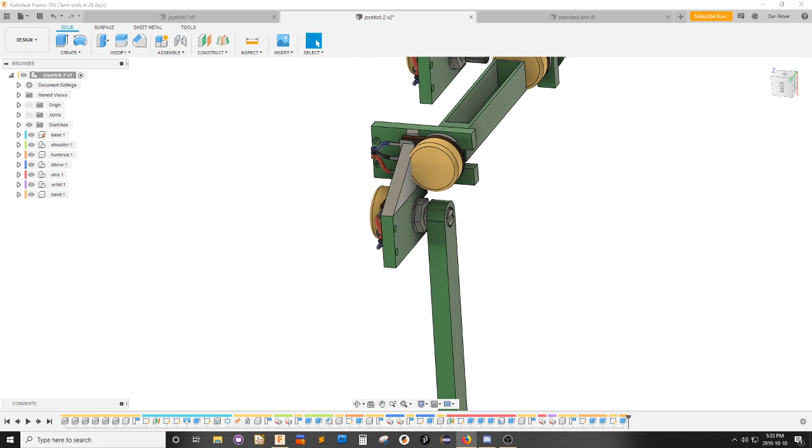This is the last iteration of the joystick that I made yesterday. Here's the original version. This is the joystick for the robot arm that you've seen me building on Instagram. It's a scale model, and all it has in it are sensors.

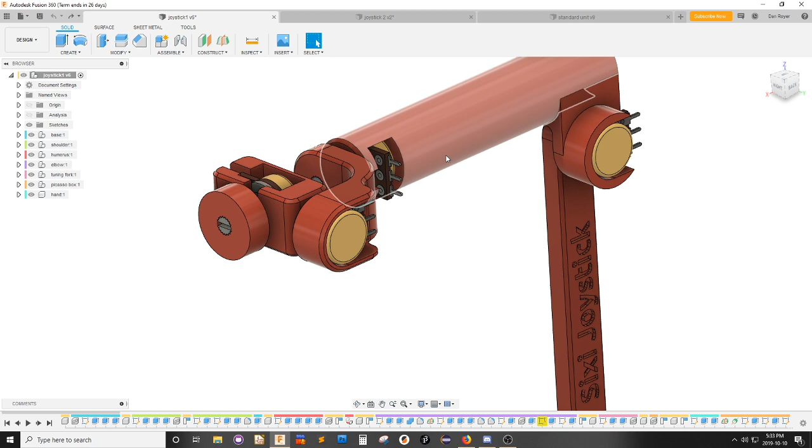These are potentiometers from an electric guitar. They're really cheap. I tried to make a press connector that would fit onto each of these so there wouldn't be any soldering in this design, but I couldn't do it. So my goal today is to look at these, put some wires on the ends in the virtual model, and then add strain relief so those wires will never fall off while the joystick is being used. That way it'll be durable, and then we'll be able to 3D print these designs and test it out.

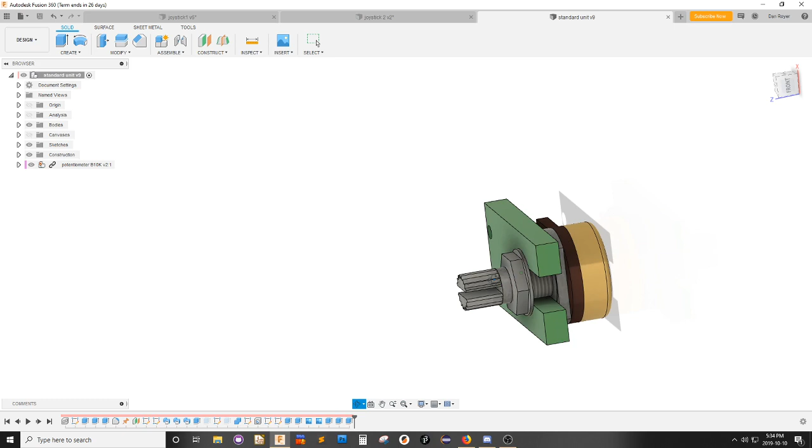What I really want to do is add, I got a standard unit I put over here. This is a potentiometer, that's all the colored parts. On the back here you can see 3 wires that I modeled with a sweep command, I believe it was. And then this green block is a 3D printed piece.

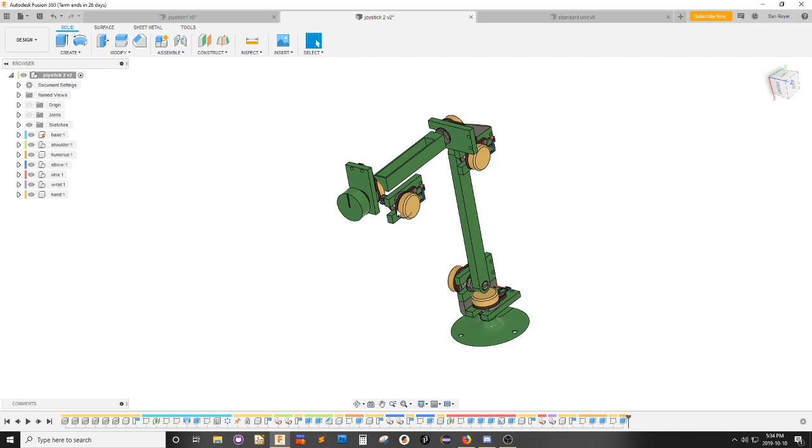So what I got from that is this design. You can see each of these standard pieces here, and my goal now is to connect these pieces together into a single block that I can 3D print. Ideally, when these blocks are put together and 3D printed, there's no support material at the end of the job, because cleaning parts is stupid. It's a waste of plastic.

This was hollowed out with a shell command, and I have no idea if it's a good idea. Where was the shell command? This one. I can suppress that, and now it's just a solid block of plastic.

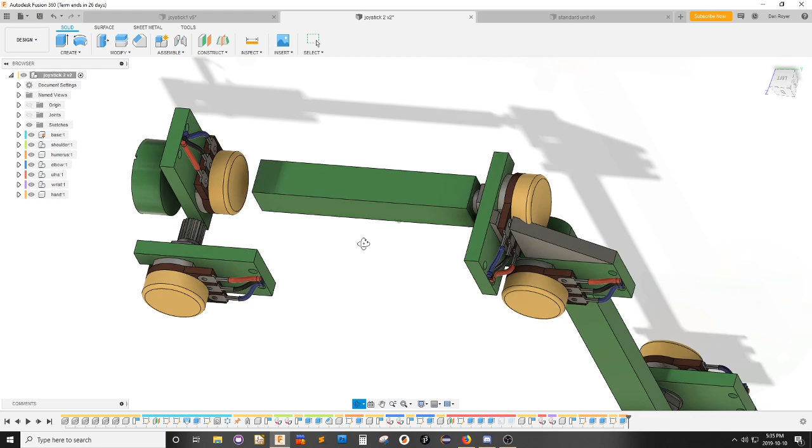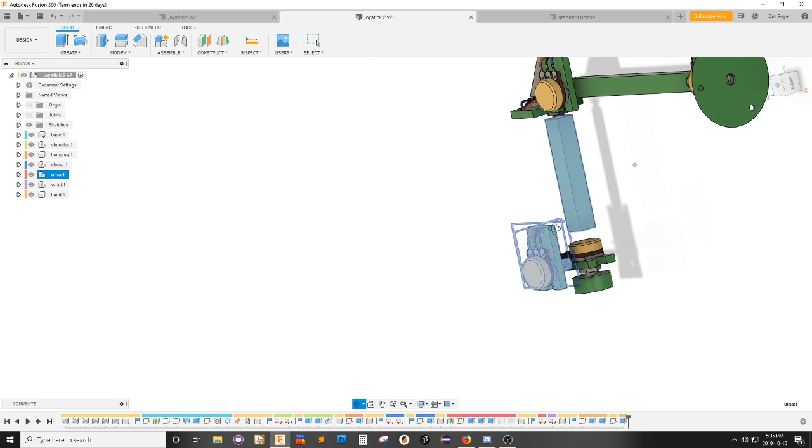So of all the parts in here, this one will probably have support if I print it facing up like this. See, there'd be a block in here to fill in this gap. No matter how I turn it, if you imagine this piece and this piece were glued together with something in the middle here, there's going to be a side that needs some support material. So this piece really pisses me off.

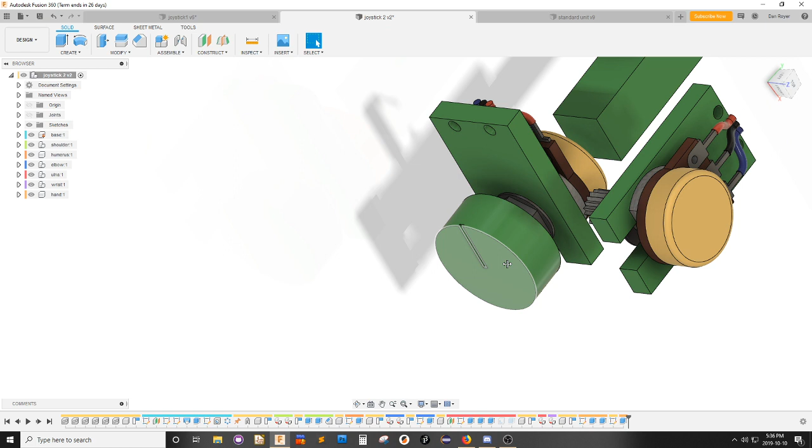What else, what else? This has a line on it to indicate direction, and this is the hand, and you twist this. But this is just a placeholder, because what you really should have on the end here is probably a handle, something that's easier to grasp.

Those of you who are following along who have your own design software, you could show me a model that you think would fit on here, and I'll print it out and try it.

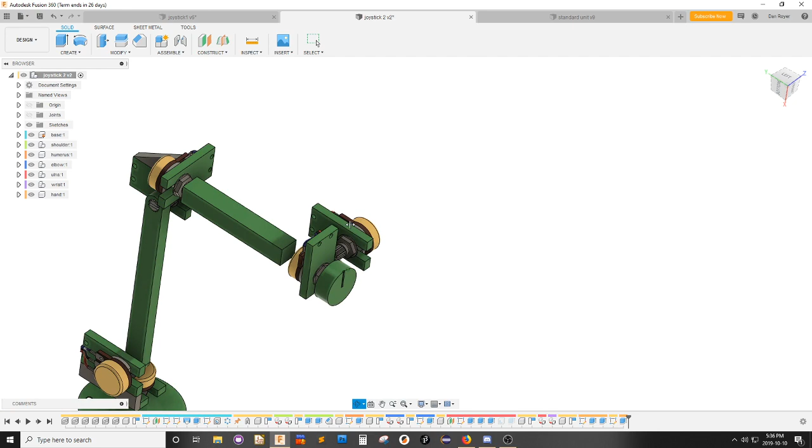Okay, what else? So I have to connect this piece to this piece, and if you have ideas about how to change this so that I can avoid the support material that would probably be under this edge, under this side here, then I would like to hear them.

Because right now all I got is to bring this side down to match this edge. And for symmetry's sake, I feel like I need to go this way up to this edge. Now there's a lot of waste material in there. I'm sure we can cut some of that away.

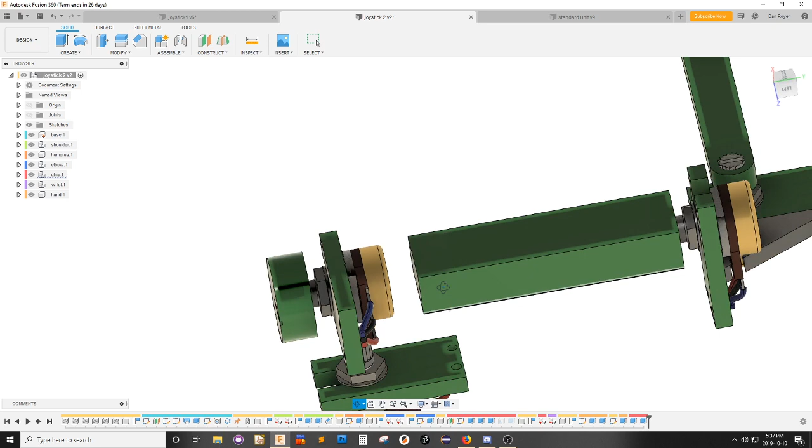Next, let's connect this part and that part. Let's see, yeah, I'll do it from this direction. I select this face, that is in the ulna. I want to create a new sketch on this face, thank you. I want to project this whole face so I can see those corners behind there. And then I want a rectangle from here.

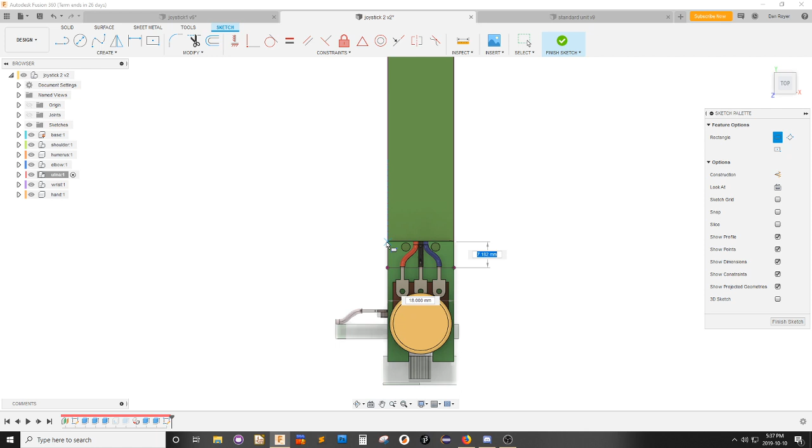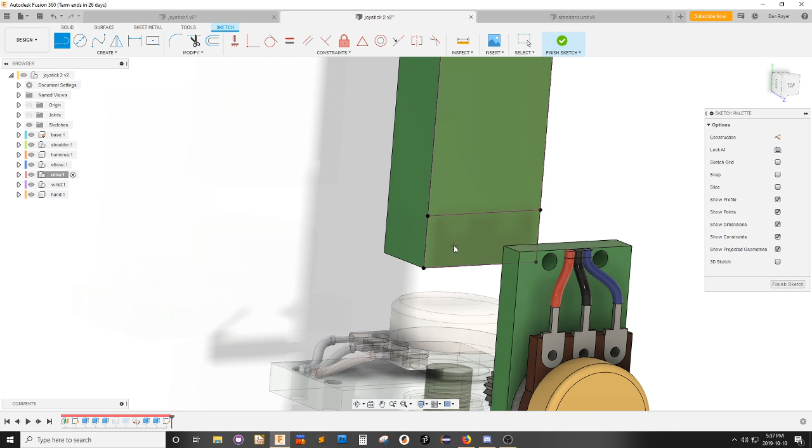Oh, let's project. No, I want to project P. Yes, that one. Great, so there's the block, and I want to, oh, I can't extrude that yet. Right, I'm going to draw a line here, and a line here. Now that should, yes, that is closed. I'm going to bring that all the way up until it touches the other side.

So that's at its simplest, ugliest, most basic design. But when I print it this way, there's a little support material between these two edges. Boo, hiss.

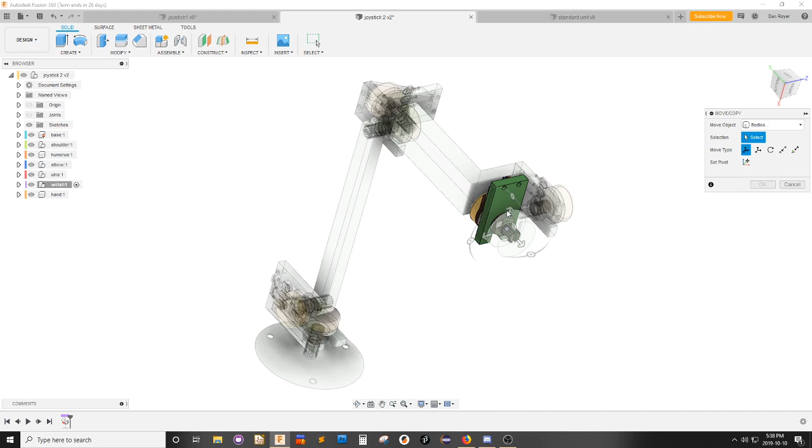This part on the end, this wrist, I think I need to turn this whole thing. I want to turn you around. Yes, please, that line. I want to turn you. No.

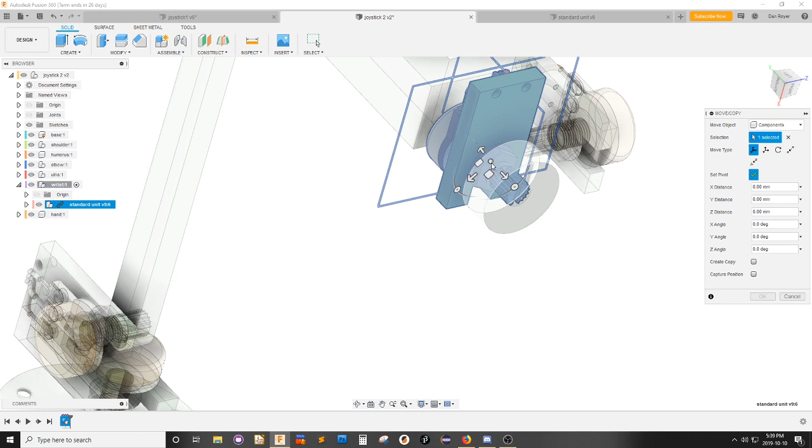This, turn you around. Get that circle again, where did that circle go? Yes.

And I want to turn you 90 degrees this way. See, this is, oh, this is the worst. This is the one piece that needs to come from above like this. Actually, if I do it for this one as well, then I can avoid that support material. Okay, great.

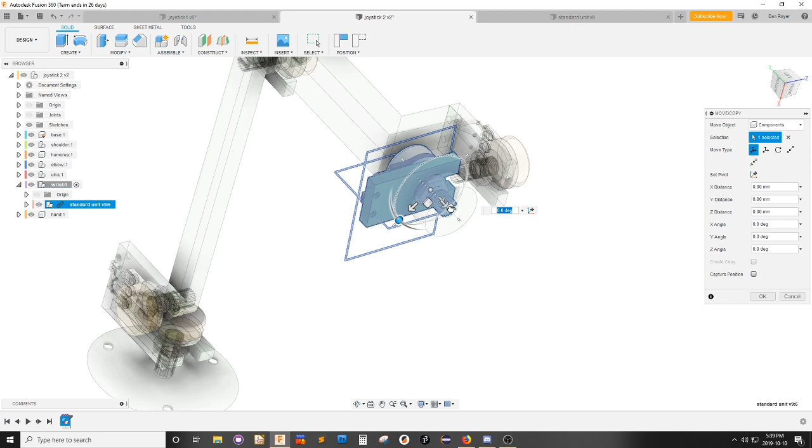Now the reason I want to put it this way is because when the wires come out here, they will loop around this way and attach here. And the wires from this side will come this way and maybe come through a hole here and meet up with them. And then they can both run down the outside of this arm.

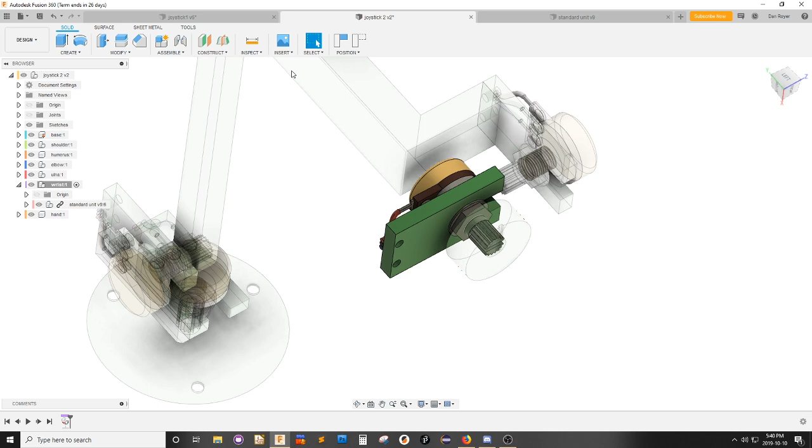And when they get to the back of here, there's an extra loop which zip ties in with these other three. And then these come down with a loop to here. And then maybe they come down with a loop to here. And then all these bundle together with these two and they come off of there. And so you've got a big cable at the bottom. It's got all the bits.

So let's try that again. This one comes to here, and this one comes around this side, and they meet up, and they come all the way down here. They meet up with this one, and they come down here like this. And they come down here, and then they loop off to here, and they meet up with the last two, and then they come off the back.

And then that goes to an Arduino, and that Arduino connects to your computer, and that's how the signals from this go into the simulator or drive the robot. That's the message that gets sent over the internet to my machine.

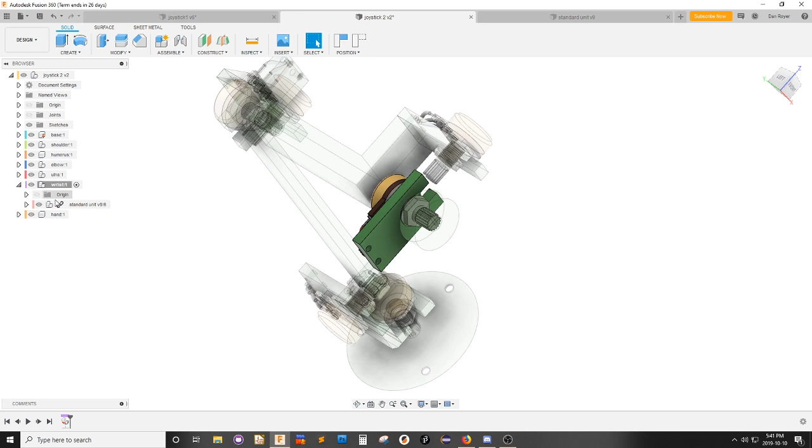Okay, so this is fine, but it needs to cut from the other side, right? Let's see. If I do the standard unit, if I copy, see, I'll close the standard unit, and I'll copy this to right here in the joystick folder. Yes. And rename this standard unit side cut.

Which way would that be? Let's say that peg is south, so I want a west cut. And this is a standard unit. Standard unit south cut.

And I want to copy this again right here and rename this east cut. So I've got unit west cut. So now I've got to change this to a west cut and this to an east cut. Let's do that.

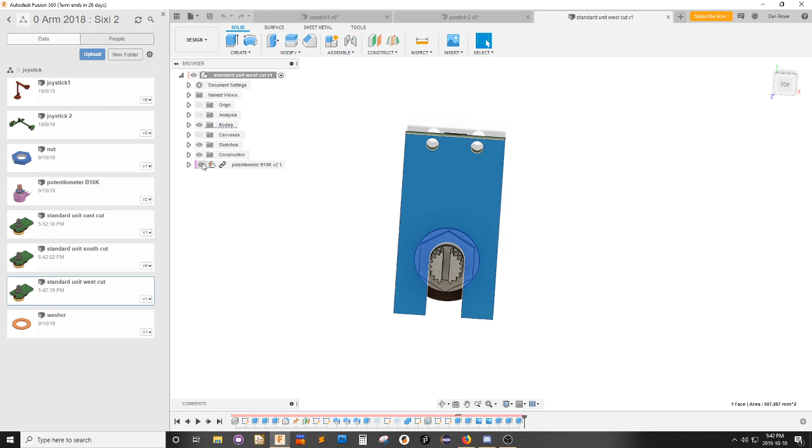Okay, a west cut. So I don't need to see this. I don't need to see that. I don't need to see those wires either. I just care about this block.

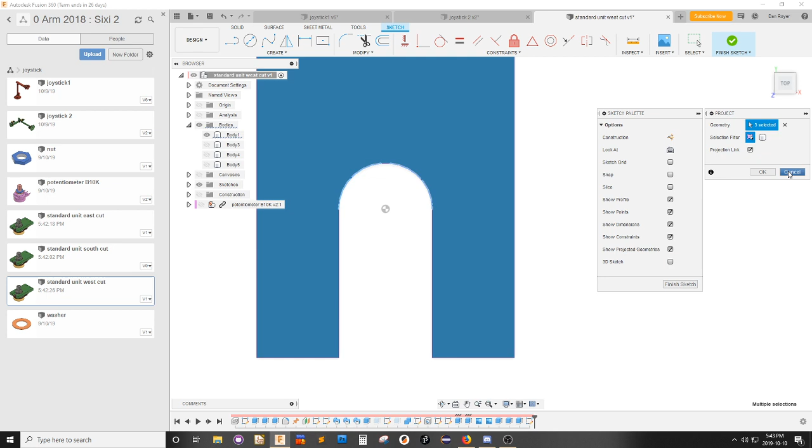Create a sketch. Project this, and oh, let's try project. Cancel that. Take all of that. Weird, you won't let me project it. Fine, here's a circle, here's a rectangle.

Give me the other rectangle. This one to this one. Great. Let's do that. This is still a closed shape. Perfect. Extrude that, extrude that down to this edge.

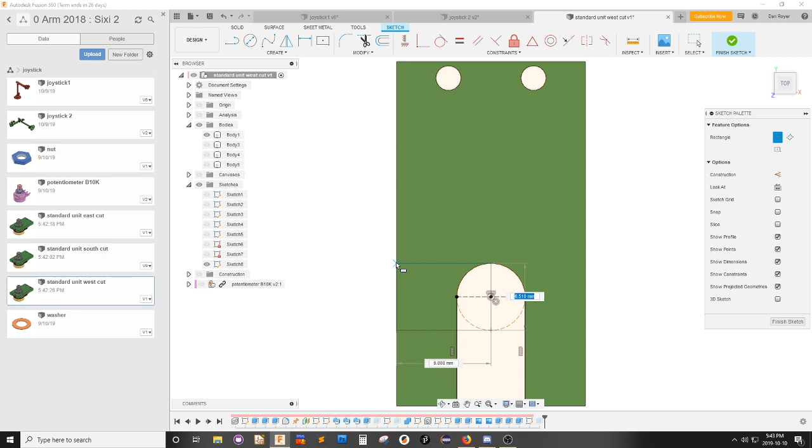Wunderbar. I would like to see that sketch actually, because I want another sketch that goes from here to here. And then I want to... oh, why did that one become like that? It gets confused about which one is which because I shouldn't have done them both in the same sketch.

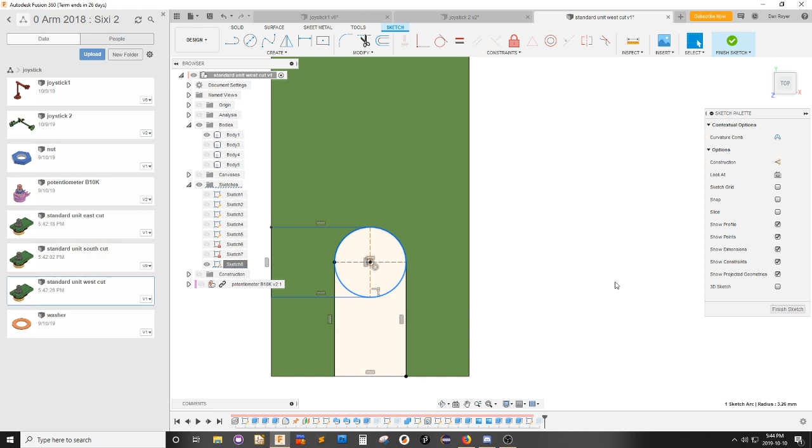Okay, and then I want to extrude this and this and this. I want to go down, cut them right out. Okay, that's my west cut. It looks like a face. Hello. East cut.

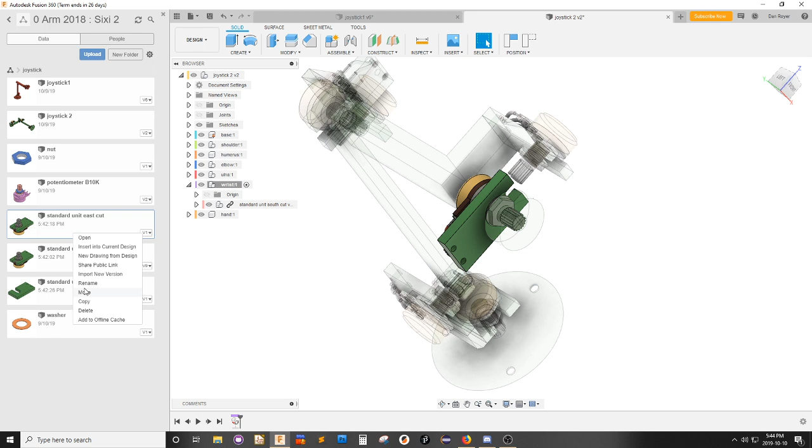Stay hydrated, homies.

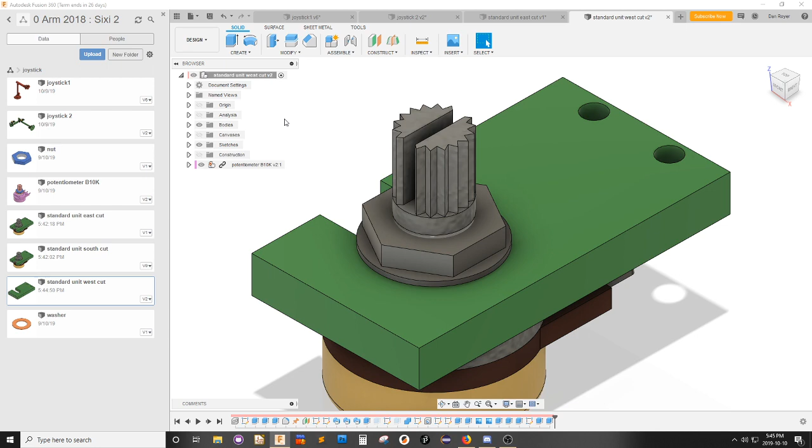Oh, I gotta put those back. I think that's it. Oh, the other bodies. Yeah. Okay, this is the east cut.

Top view. Create sketch. There's a circle. There's a rectangle. I used the shortcut key on the keyboard. Oh, that's not in the center. Ooh. Good.

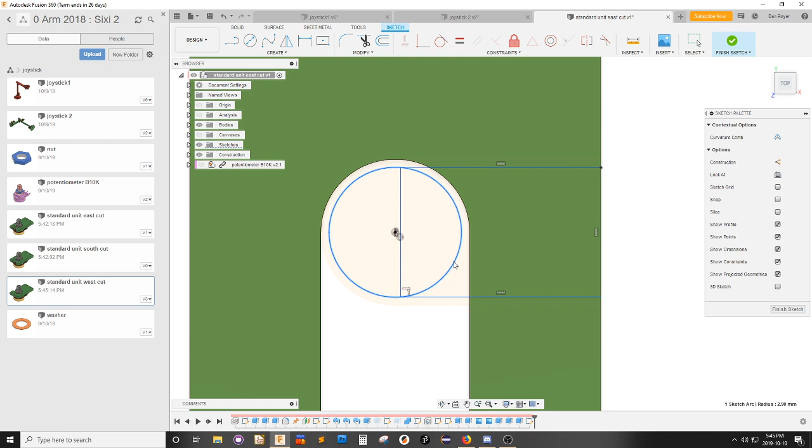Now, for whatever reason, you and you are coincident. That's more like it. And then I need a rectangle from here to here. It fought me the last time too, didn't it? Yeah, that's what I'm looking for.

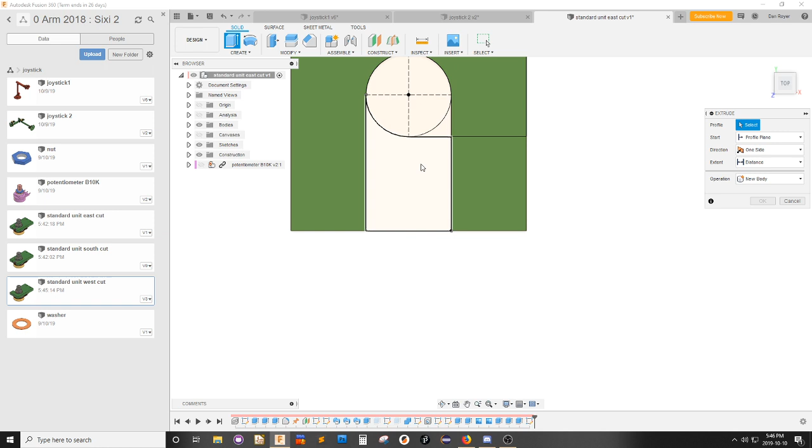Okay, so then I extrude. Let's cut this one first because that just seems easier. Oh, I love the way that looks. And then bring that back. Extrude, extrude, extrude, extrude down to here. Oh, I missed that line over there. Ha ha.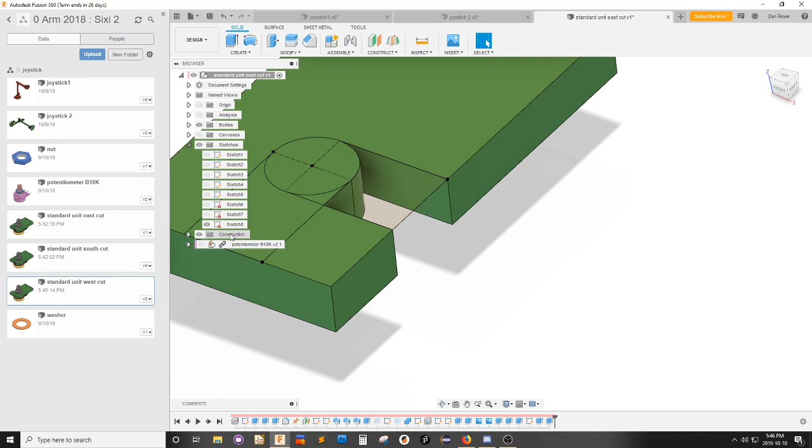And that last extrude, I want to include this. Oh, that's what I'm looking for. That's my east cut. Now I can bring back, the bodies are still there, so that is still there. Good.

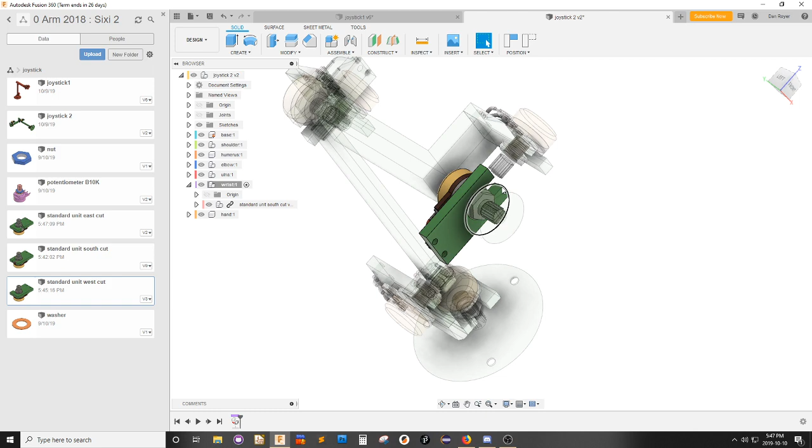Nice. Now, some of these have been put in as south cuts, and they should be east cuts. This one, in particular, should be an east cut, so that I can then attach this part to this side, and I can print it facing up this way. Yeah? Okay, good. So I'm going to just hide this and put the other one over top of it. I want the east cut. There's my east cut. Now I just move it to be on top of the old one.

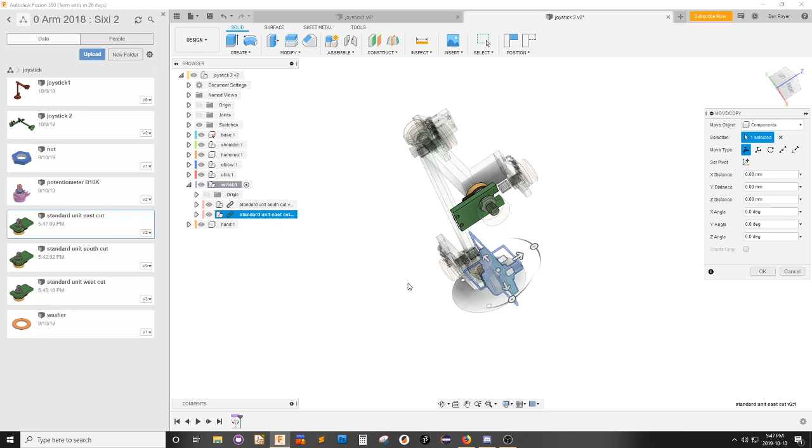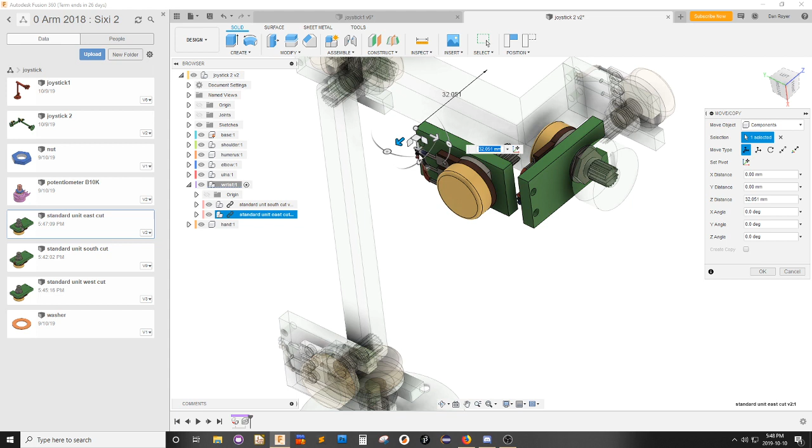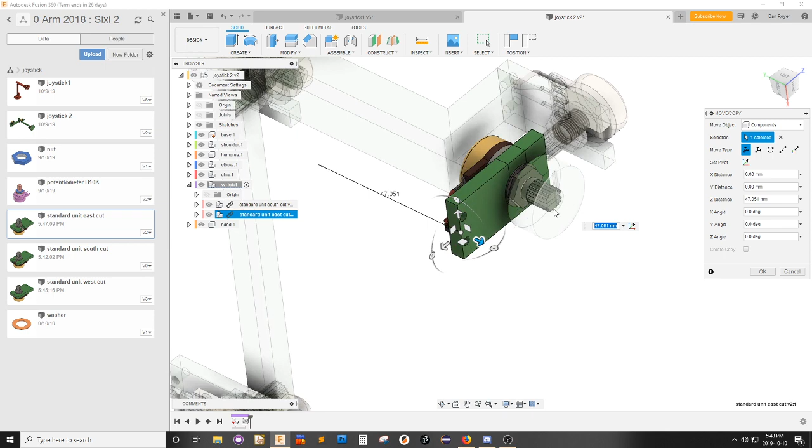Let's see, if I put the pivot onto this corner, thank you, and I go up to this corner, which is the same corner, and then I come down to this corner, and now I rotate it this way 90 degrees. Now I'm nearly there. I just got to let's see if I can do the pivot again. I can move the pivot, and I can say I want to be in the middle of this edge. Thank you very much. And now I flip you around 180 degrees. Now we come down this way to here. Boom. Perfect replacement. Now hide this one. There we go. There's my east cut.

Okay, so let's go back to the ulna. See, actually, you know what? Since that's the wrist, while I'm here, I will say extrude this. Yes, capture the position. Extrude this as a new body. Perfect. And I'm going up to this face. Yes.

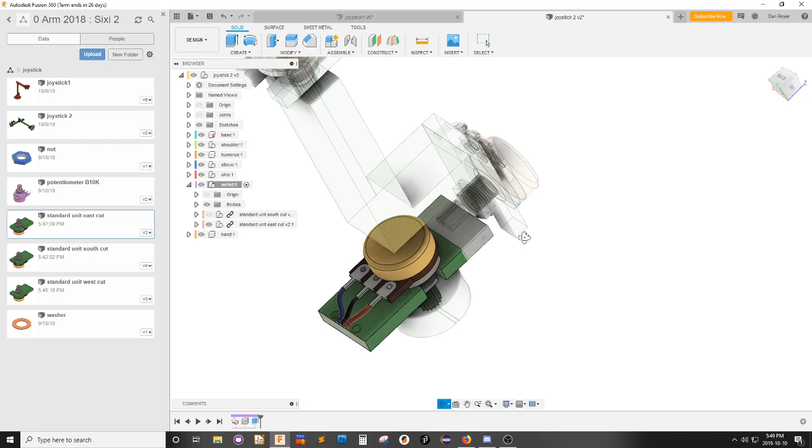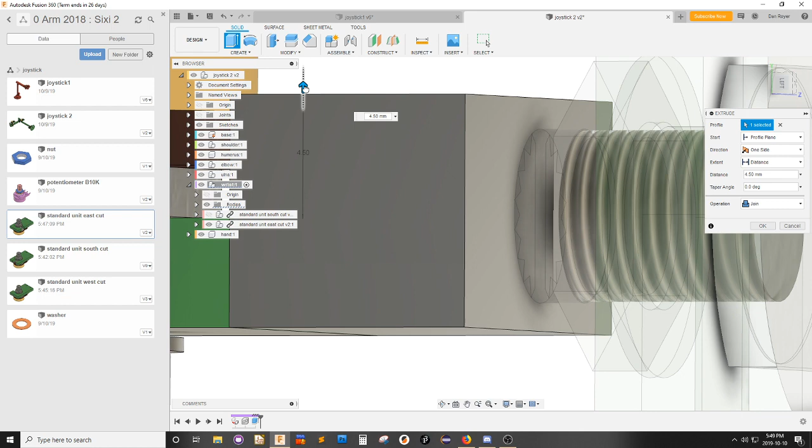And now what I really need now is a block that goes around this. Probably I 3D print this facing down like so, and that means the block comes up from here. So I can say from here, go up another 4. That's pretty tight. There's not a lot of material on both sides. Actually, I got more on the bottom than I do on the top. Let's try 4.5. That's looking about right.

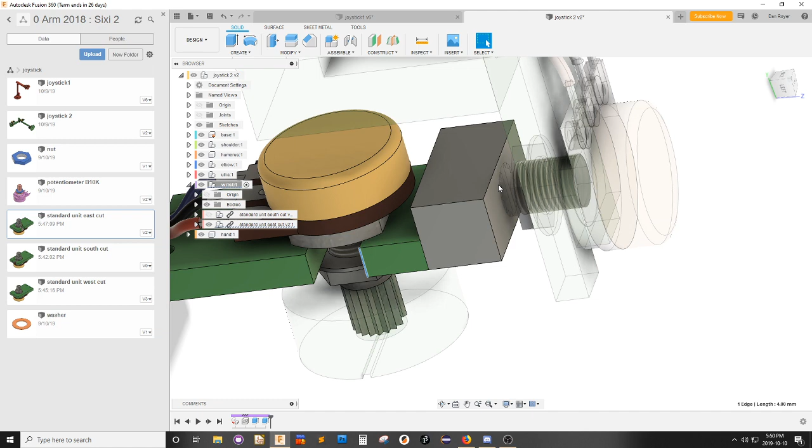Let's see, how thick is this edge? From here, give me this edge. 4 millimeters. So I'm actually in front of center here. This is not centered on this line. Not that it really matters. I could probably cut this corner and this corner, which are on the top of the print. It wouldn't make a difference. I might put a hole here for a screw that could press against the inside of this shaft, but this is a press fit. It's supposed to be snug and then it doesn't slip. So I can probably shave this corner and this corner.

Let's try half a doot. Oh, that's perfect. Half a doot worked great. All right. So next part down. So that is inside that. Great. But this needs to be a west cut.

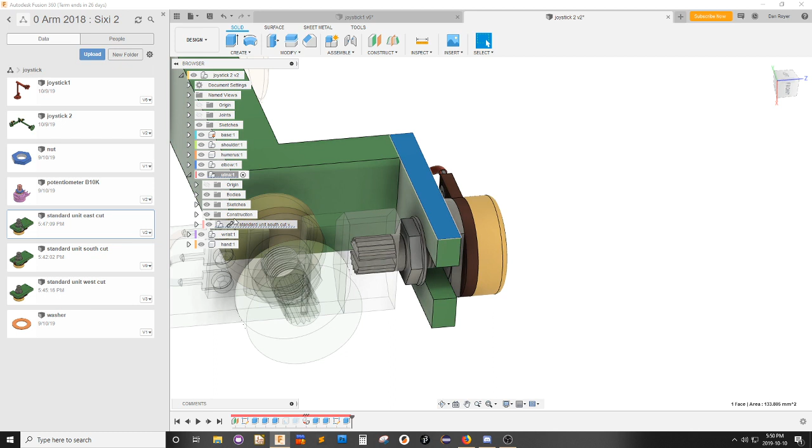My name is Colonel Westcott. I was replaced by Colonel Mustard at the last minute. I was supposed to be in Clue. I'm making that up. I don't know if that's true. You didn't hear it from me.

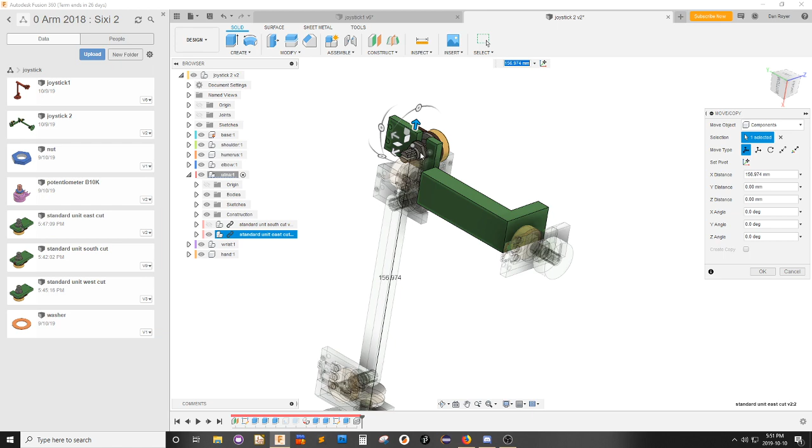East cut. Yeah, I said west cut, didn't I? I'm pretty sure I did. Let's go to here because it's close. Down from here to here. Right.

Right. Jolly well, we got a bloody right to sing.

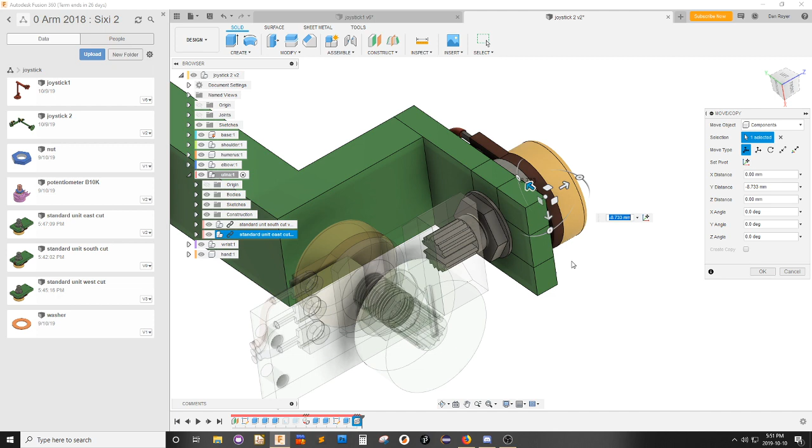Quite right. And I want to set the pivot on this corner, please. Thank you. And move you to here. Move you to here. And move you to here. Okay, now I can hide the first one and I've got to cut the right way. Yay! Oh, that's how Lego works, people. Perfect.

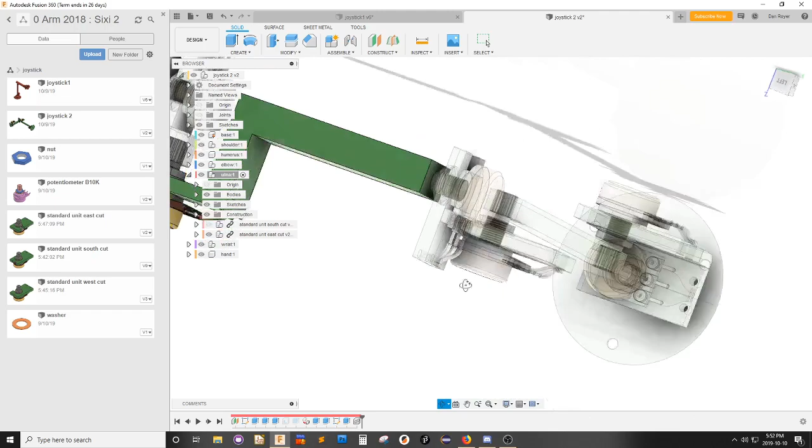Now, oh, I should build this out of Lego. Just screw all this mess. Oh, what a great idea. Buy me some Lego.

Okay, so when this prints, I gotta go back a part now. These are actually probably okay. So this prints this way, and that's probably the best I can do. There might be a line that comes right up the center here.

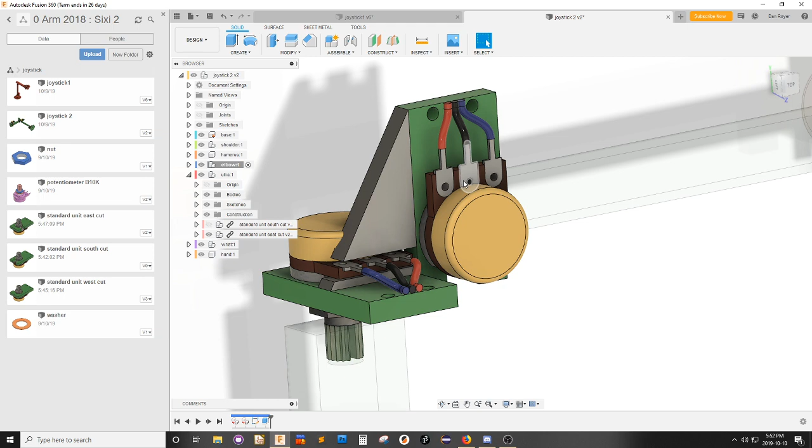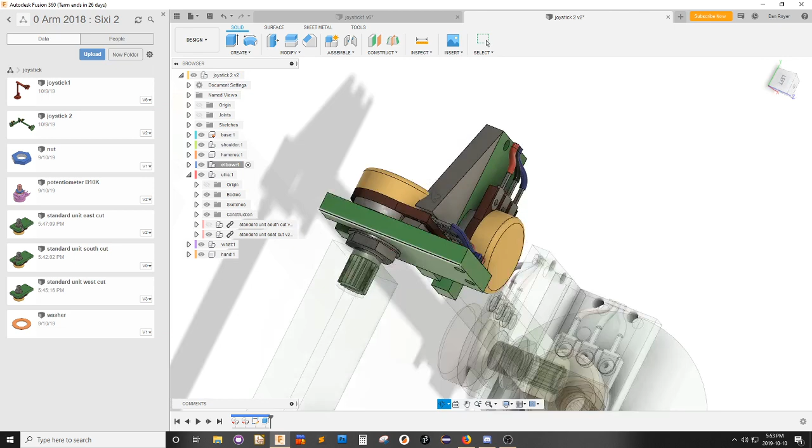There is no south cut because then there would be no material here, and there's no angle like this. There's no round cut like that. That makes a hell of a geometry, and I don't know why I'd do that anyways. This is by far the most uncomfortable one in the design. If this were turned around and it actually didn't go through here at all, then it would be an east cut.

So here, take this away. This is the south cut. This is a south cut. What I really want to do is replace this with an east cut.

Move type, translate, rotate, point to point, point to position. No. Free move, translate. No, what I really want to do, I want to have a button here that says replace the one I had. Really, that would be the best. Do I have a replace here? Group, copy, appearance, properties, export. Choose version.

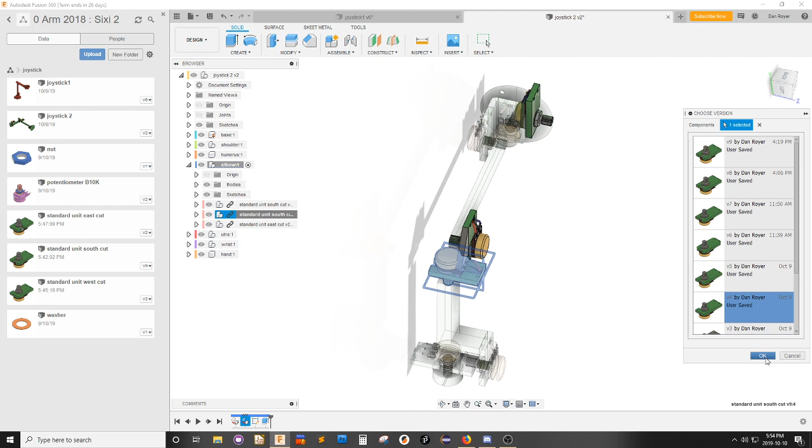Oh, shit. Really? Oh, I had to build them all as versions and then I could just switch inside here. That's weird. I'm not going to do that. I'm uncomfortable with that. Move.

Pivot, please. How about this corner? No, that one kind of sucks. I think it's this corner, which is going to be up here. You'll see what I mean in a second. Whoop.

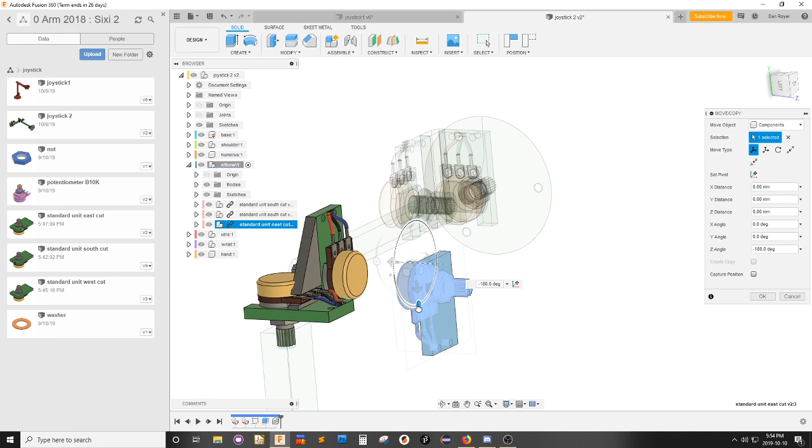Yeah. So if I flip this over 180, and then I turn this 90. Now I come up to this corner, see? Come up to this edge. Excuse me for the mess. And I come this way to this face.

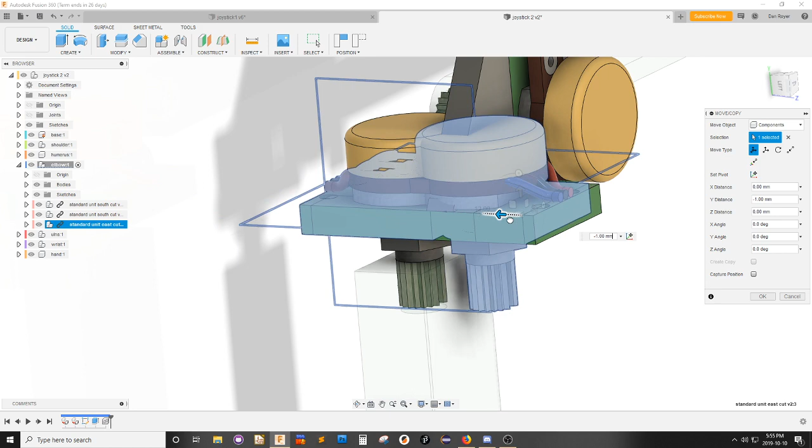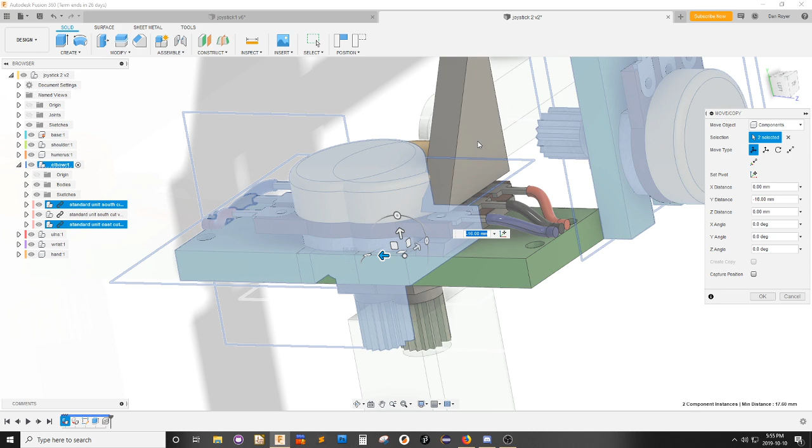And I go this way to this... to that face. Really, it's to that face. It's to... Oh. I'm like, well, I want to let me pick this face. Okay, so how about if I hide this one now? And I move this one until this face is here. Thank you. That's all I wanted.

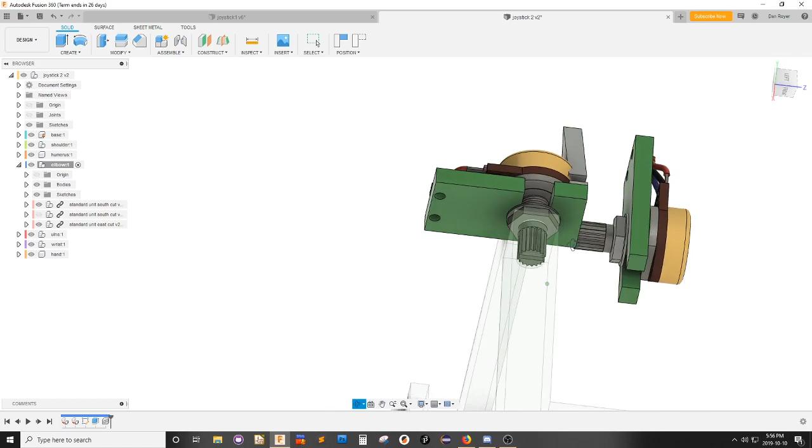Okay, so this is still backwards. Yeah. So this should be turned 180 and brought this way until it's centered. Yeah. That's what I'm looking for. That's what I'm really looking for. That works. Yes, that's still working for me.

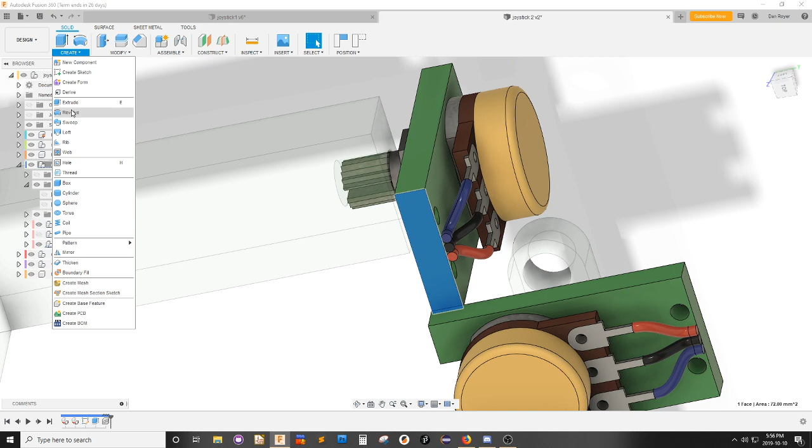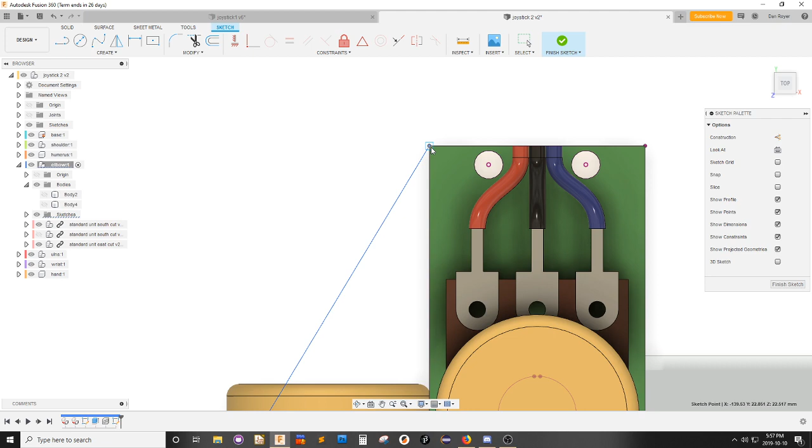This triangle is in the wrong place. I can get rid of this. Both of these. Because what I really want is off of this face. I want a triangle from here. Not a triangle. Give me a line. From here to, well, you're not going to attach. Okay, project you. Snap. Then project this. Well, yes. Extrude this to here. Okay, so now, so there's room for this.

Oh, see, now I need to cut a hole through here for that wire.

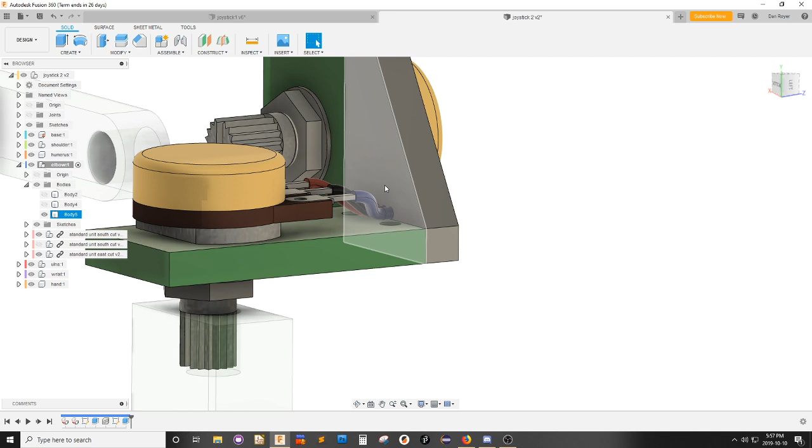And the hole I cut will be a hole that doesn't require support material. Okay, let's go back one to this sketch.

And I need to cut something that goes like this. First off, I need a rectangle here. Not a rectangle, excuse me, I need a triangle. Where's the end gone? Polygon?

Edge polygon. Yeah, let's go from here to here. And let's say I want 3. Okay, so then I can put a line down and a line down. Whoops.

No, I want it from this edge to this edge. That's not good, thank you. From this edge to this edge. Let's say 6, because I like a nice round number.

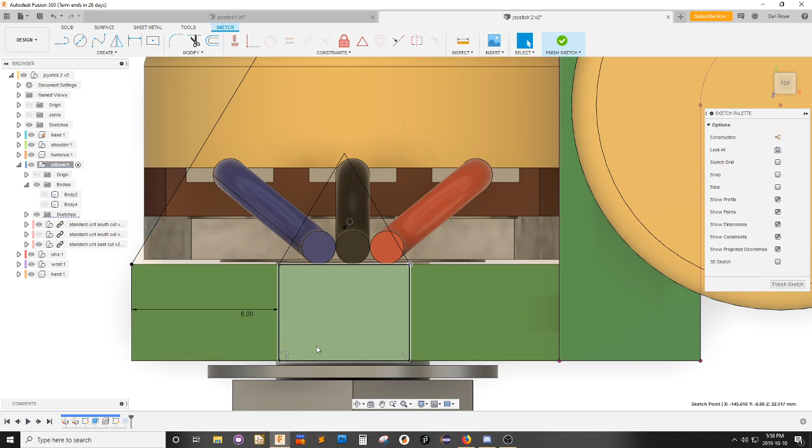And they say this one's also 6. It shouldn't be, because this height, I don't see a measurement on here. I don't know why I can't change the size of that. That's weird.

I just want to be sure I clear the wires.

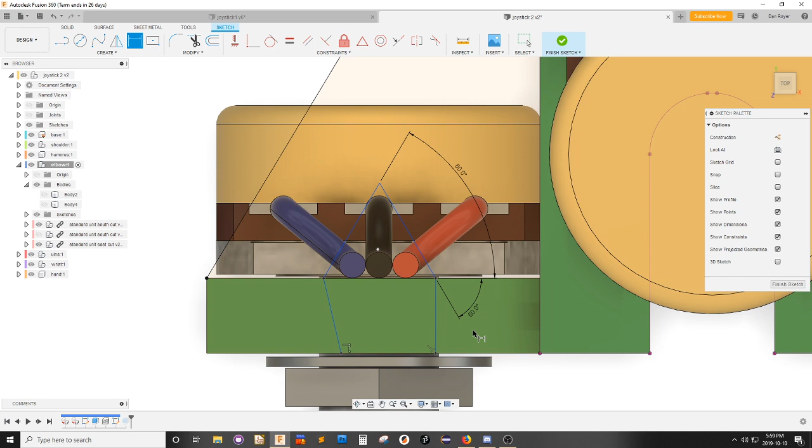And you can go back to being straight. Thank you. From here to here. That's nearly centered.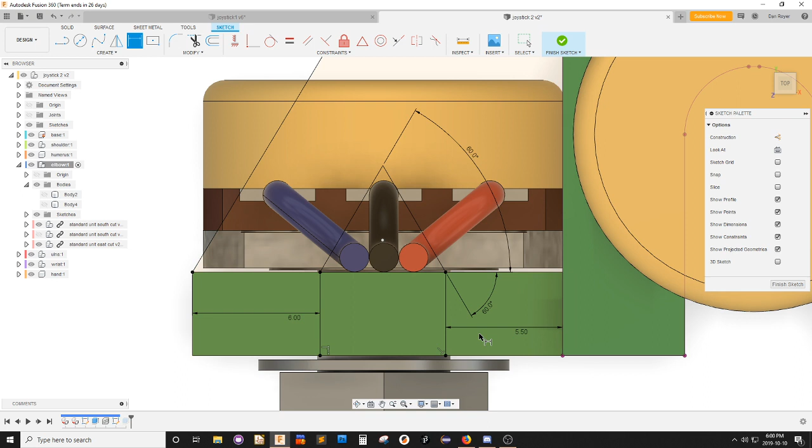I think it'll be enough. Okay, so finish this. Now, hey, when you extrude, leave these 2 bits out. So it's going to print this way up, and it doesn't need support material in this hole.

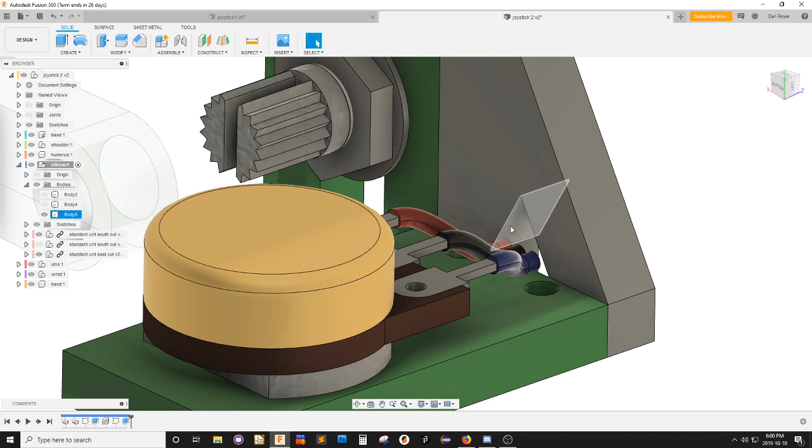I know this is a 60-degree hole, and I could have done a 90-degree hole. Some printers are good enough that they can do a bridge over here and do a flat surface without support material, but I figure why limit people if they've got an older printer that's not well tuned.

What else? Well, this is all the way out here now, so that's not right. What was I? Oh my God! Oh wow, I'm such a mess.

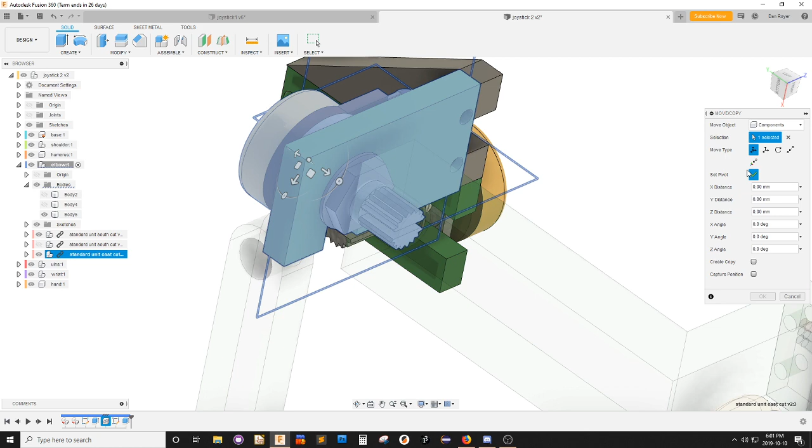I totally forgot the plan, man. Okay, so I made that body for nothing.

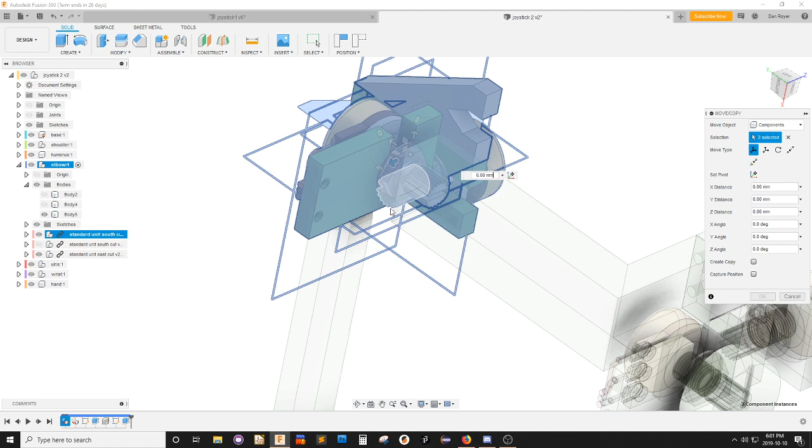Yeah, that one and that one. And I want you to both move. No. I want to move this. And I want to move.

So it automatically selects everything. That's dumb.

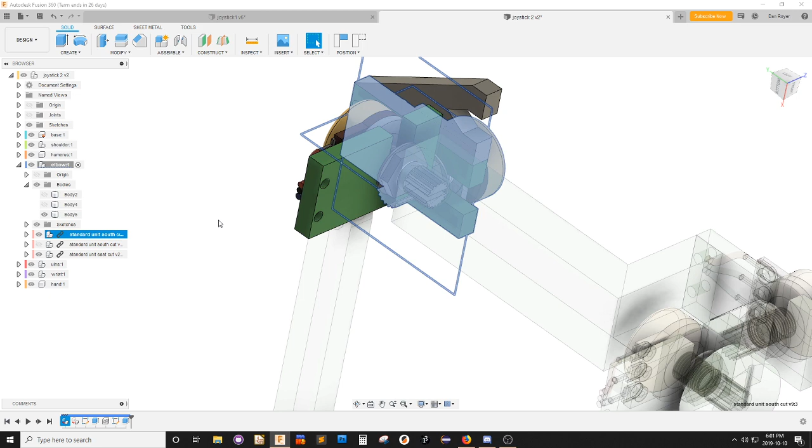Why did that one go too far? Oh, because the dot must have been in the center of the part instead of on the surface.

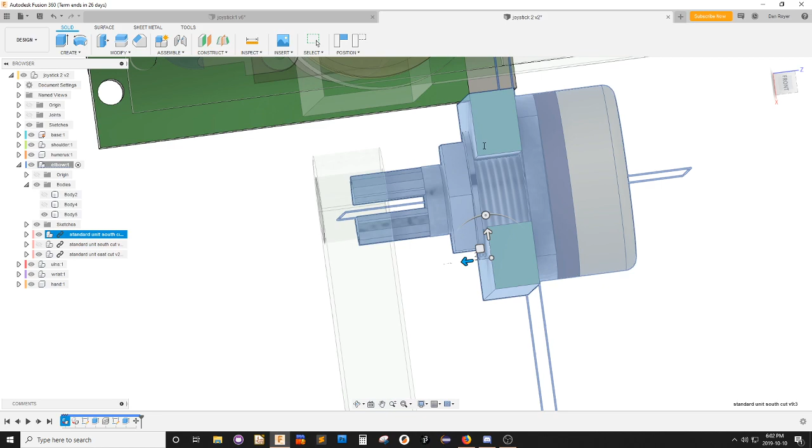You're lined up with you. And this is just a hair too big now.

Hey, so how do you like that? It takes up even less material than before. So it's going to print this way up. And I don't even need that doorway thing now.

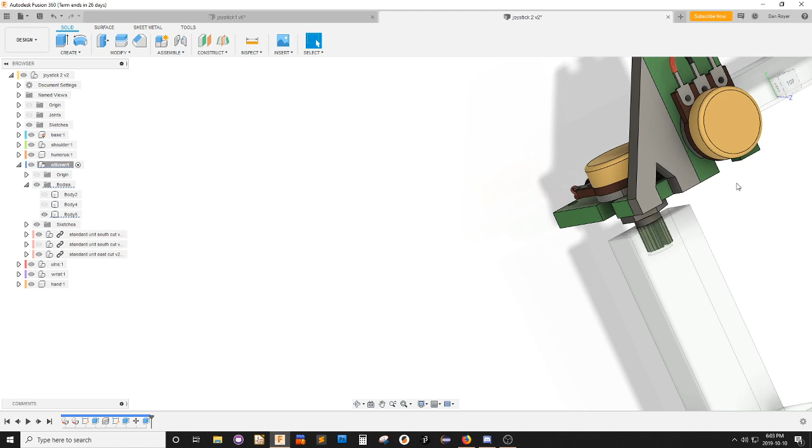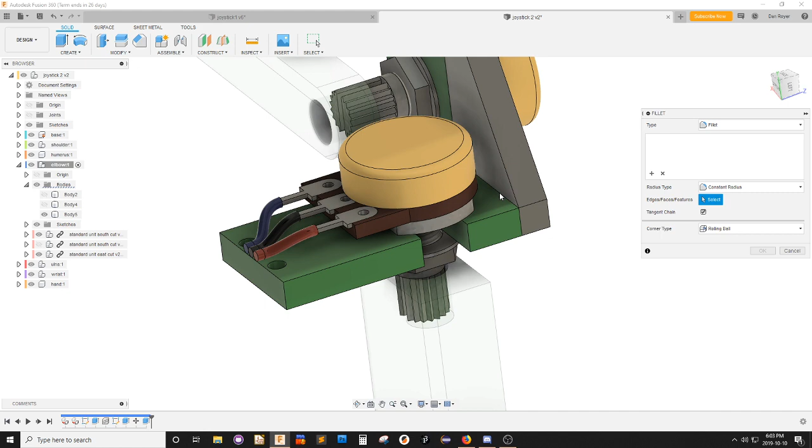That was a total waste of time, ladies and gentlemen. Okay, so it's going to print this way up, and what I am going to do is add a small fillet. Oh, I can't because they're not merged together yet. I'm going to put a fillet in this corner to give it strength.

Okay, so this is getting less painful now. Now somehow this wire and this wire were supposed to join up with all the other wires. So this is going to probably loop around the top edge here.

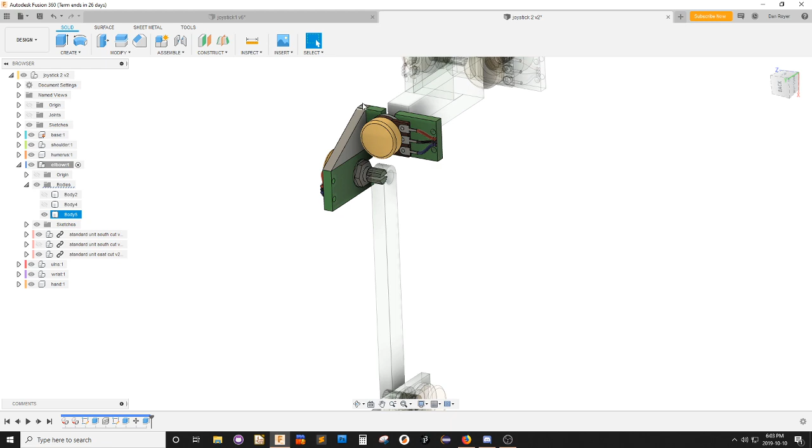Going to come around here. There might be a zip tie here-ish to hold, or a hole through here. Maybe just it folds on itself this way and comes through the back of the zip tie. It could fold on itself this way and come around this side.

I feel like it needs a hole here to hold it when it, because when the wire turns a corner, so to speak.

Okay, so then all the wires come off the back here, and they come around here, and they come down here. And when the arm bends all the way forward, the wire is smushed out on this side.

If the wires come off the back of here and make an S like this, so then they need to be attached right about here when they come this way. So there's like two of them, maybe 3 centimeters apart.

Maybe this comes in here and there's a trough like I was showing, and then it comes out. But there needs to be enough here so that when this bends, it doesn't break the wire. Yeah? It's supposed to flex naturally.

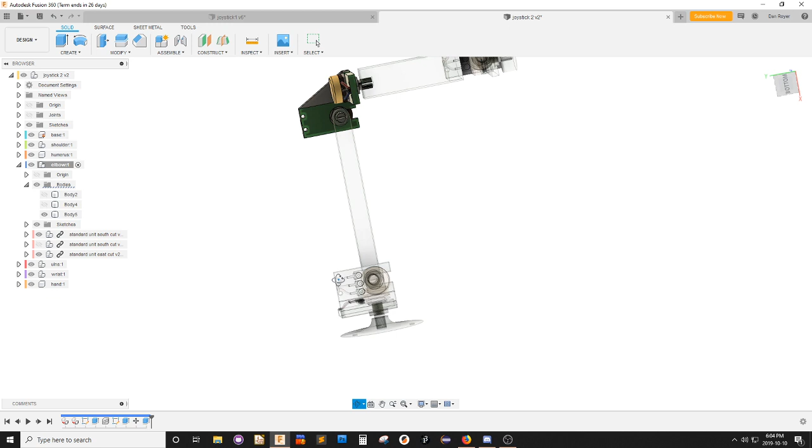And then this wire and this wire will come together with the others and go off to here to wherever the Arduino is. Yeah, now I know this isn't lined up anymore.

Wait a minute. This should be lined up. Does it kill me if it's not lined up? It's not good, it's not good.